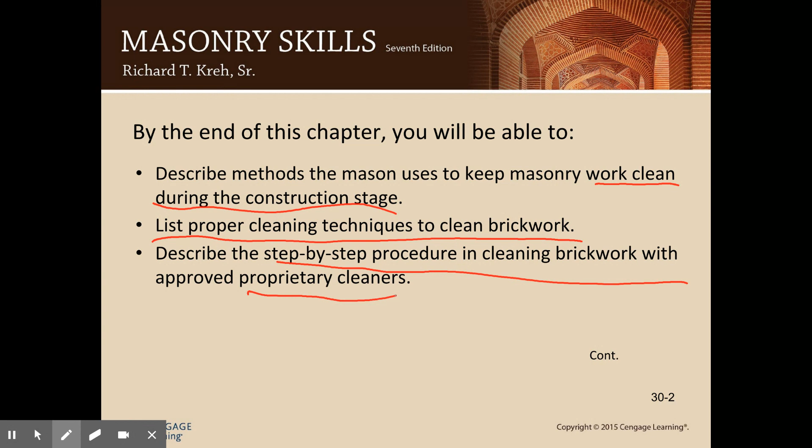You'll be able to talk about how to test approved cleaners, where to test them, what's required, and follow the brick manufacturer's recommendations for what you should use. You'll also be able to describe how concrete block are cleaned and what can happen if you don't clean them.

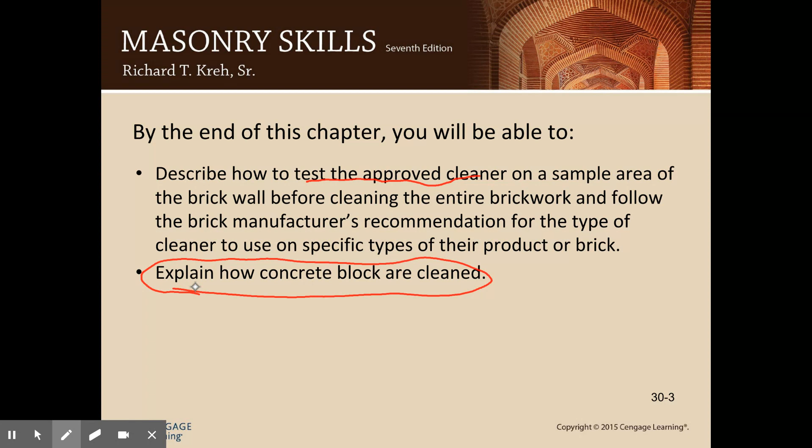After you get done laying your wall, regardless of the type of brick or block or joints, the last stage is to always clean up everything. You'll see when you're laying it, you might get specks of mortar here and there, maybe a glob there, and those all need to be cleaned off, because if you don't, it's going to look bad. If you're putting that much time and effort into it, it might as well look nice.

When you clean it, it thoroughly enhances the look of the brick and block, and leaves a much neater, uniform appearance. It's also an essential part of every masonry job that you do. Laying out, getting your materials together, laying your brick or block are just as important as cleaning it when you're done.

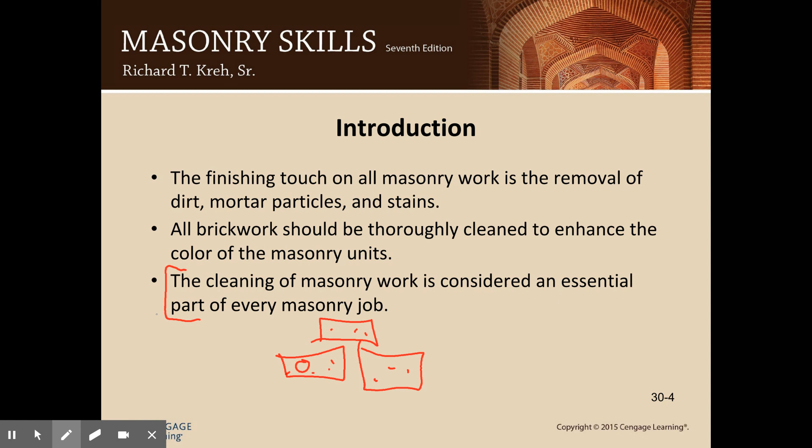There are different methods that we're going to go over for cleaning brick and block. Most importantly, you can see with this updated picture from about 1965, goggles are important, especially because of some of the solutions that you use. Some have acid, some are really strong detergents, and others have VOCs in them. So make sure you have your gloves on.

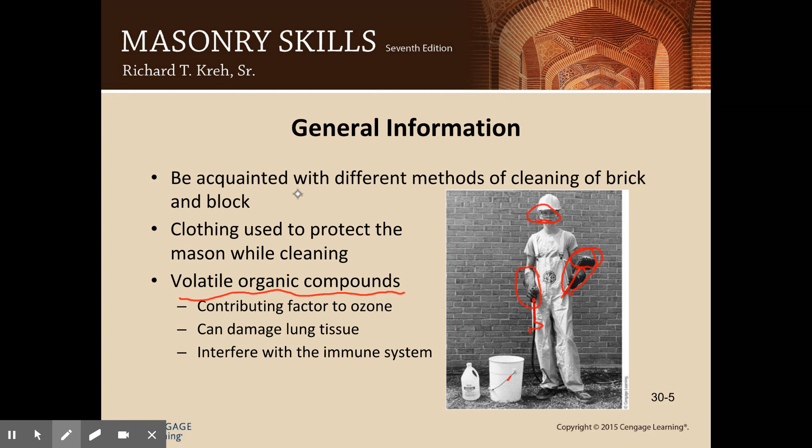You can see he has a stiff bristle brush with a long handle. Make sure you have a plastic bucket, a hose with an adjustable nozzle, and you should also have wood or concrete, like a piece of block or brick.

The reason you do that is if it's concrete block, you use a piece of concrete block and rub it across. If it's brick, you use a piece of brick and rub it across, and that gets most of it off. If there are big globs of it, or if it's really sloppy, there are ways to clean it off without marring the brick. You can also use a piece of wood to scrape off larger portions that you see.

As for VOCs, a lot of places are starting to get away from them. They're volatile organic compounds. You need to be outside to use a lot of them, and you're only allowed to be exposed to them for a certain amount of time. They can cause lung tissue damage, and sometimes you need a specific respirator just to use them.

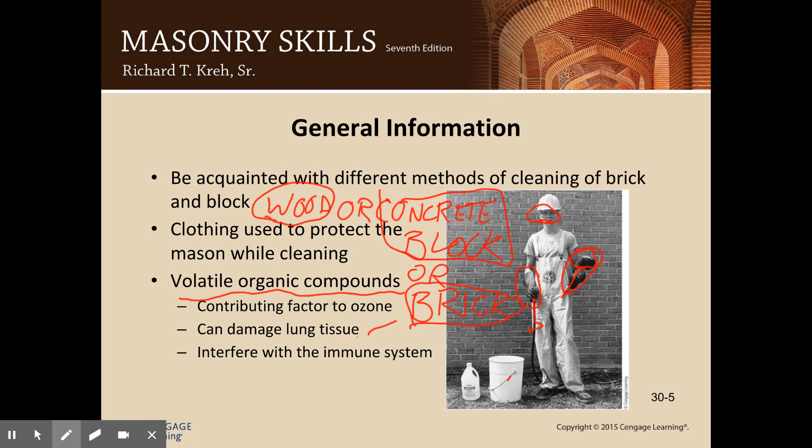Up until a few years ago, muriatic acid was the go-to for cleaning brick. It's a mild acid solution that gets scrubbed on, and it stops reacting with the mortar after about 10 minutes, and it helps dissolve it.

Now manufacturers recommend something else—they have their own cleaning solutions, usually proprietary ones they've tested and deem suitable for their brick. It's important not to clean or wash brickwork until at least 7 days after it's done. It's not because of the brick, but it gives the mortar enough set time. After 7 days, your mortar should be set, and then it'll be okay to scrape off the loose portions on the face of your brick or block, but it shouldn't affect the joints.

If you're going to use a new cleaner, always test it somewhere out of the way. Even if it's recommended, it might discolor the mortar or discolor the brick, so just keep aware of that, and make sure you test it somewhere where no one will really see.

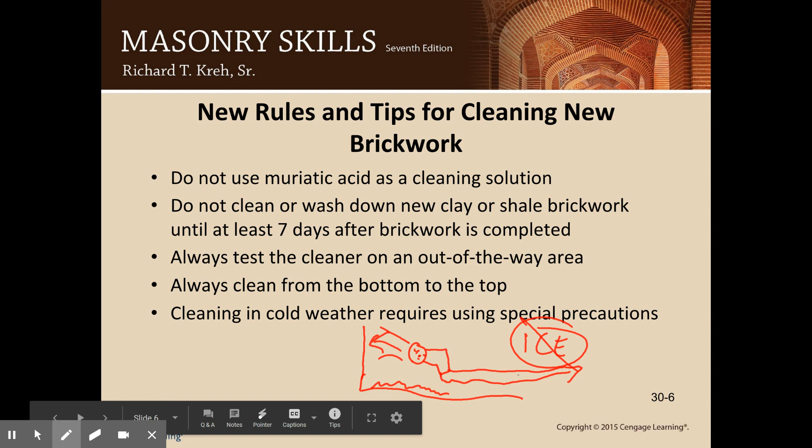So there are 3 categories of cleaning failures that you have. The first one is failure to saturate the brickwork, and I talked about this before, so we'll call it soak.

The reason for that is the brick will end up absorbing a lot of the cleaning solution, and that's what you don't want. You want the water to be there. You want the cleaning solution to mix with the water on the brick, not get absorbed by the brick, but work on the surface of it.

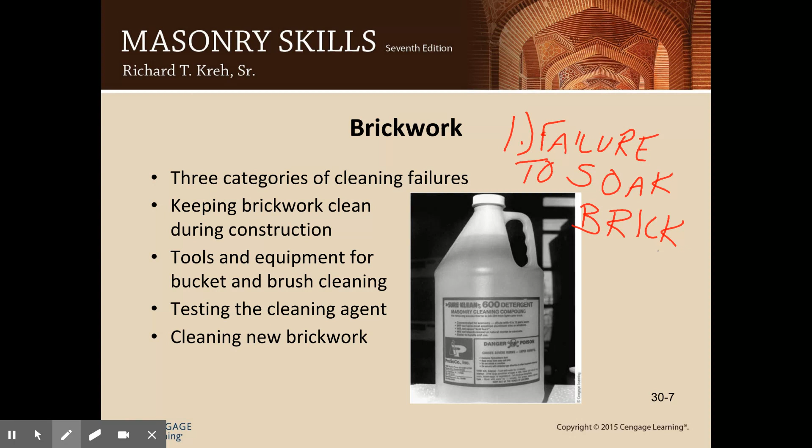Second common failure is failure to properly mix the chemical solution. I'm sure some of you are familiar with having to mix certain things. If this is a concentrate and it tells you that you need to mix 1 gallon of the concentrate to 10 gallons of water in order to be as effective as they want it to be, and you end up doing 1 gallon to 20 gallons of water, this will not clean as well.

So if you have this failure, obviously it's going to work maybe half as well. Some people try doing this because it ends up saving money, but in the long run it really doesn't. You still need to use more of the solution, and if you need to go back to clean it again, that's more time, more money, more material anyway.

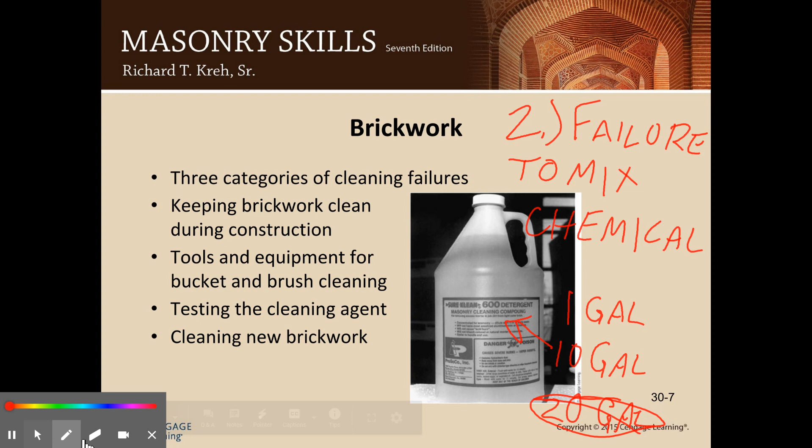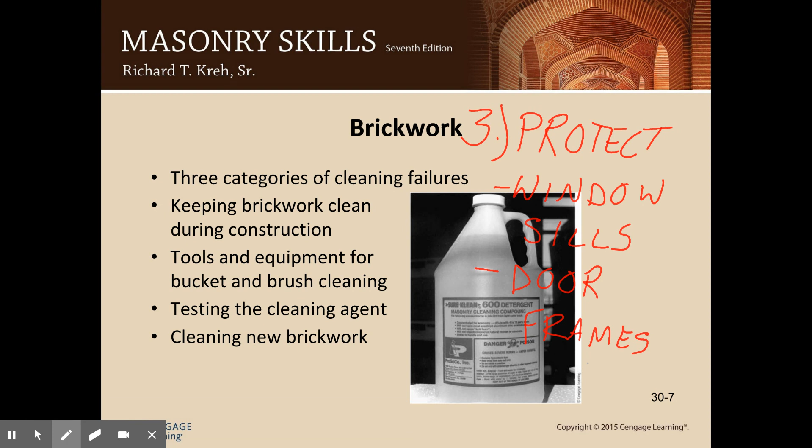So a third reason for failure is if you are using a solution that has specific properties, and you don't protect things that could get damaged, like windowsills and door frames, stuff more sensitive than masonry. If it's an acid, you could end up damaging it, and some cleaning detergents will discolor it. That's a cleaning failure, because even though you're trying to clean the brick, you end up damaging something else, and that's not the point of cleaning brick.

So if you keep brickwork clean during construction, it cuts down on the amount of scrubbing you have to do once the job's done. We already went over the tools and equipment, so always make sure it's a plastic or rubber bucket. You don't want to use a metal one. Metal buckets, depending on the solution, may react with it, and if it reacts with the cleaning solution, it could stain your brick. As we talked about before, test the cleaning agent, and always make sure it doesn't stain or discolor your brick.

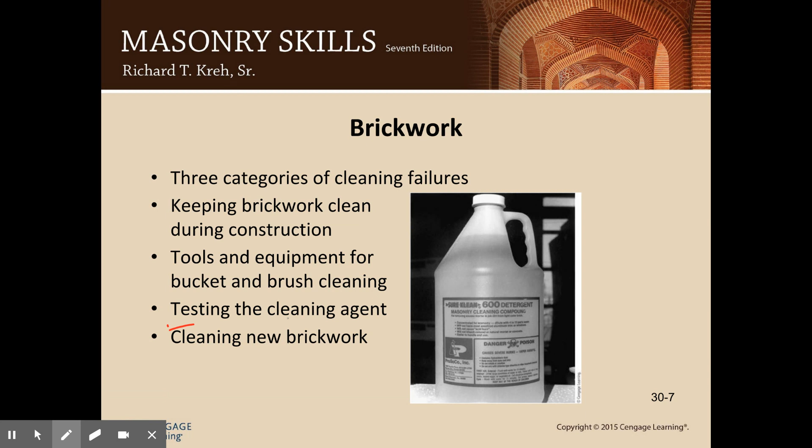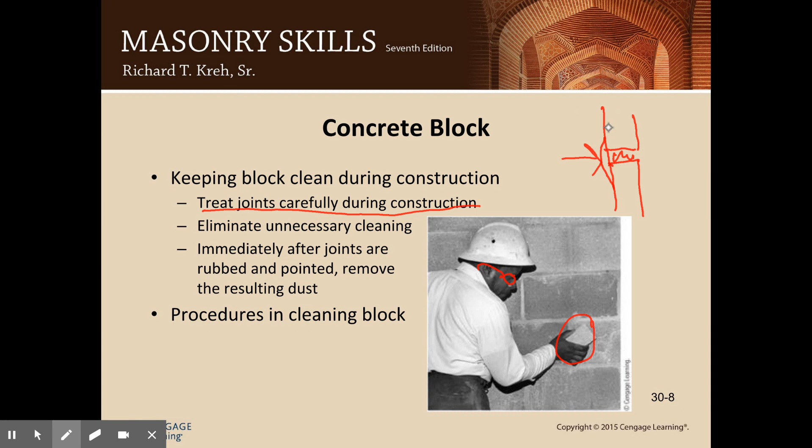Now, when you are laying block, it's important not to be sloppy. We went over in other videos the different types of joints you can have. If this is your block and this is your joint here, centered on the blocks, you can knock it back flush. But sometimes when people go to knock it back flush, you'll end up leaving a lump like that. It doesn't stick out that far, but it's still like a patch that you can see. If that occurs on a finished wall, you're going to see that through paint, through anything, and it just looks really bad. If you're taking the time to lay up a block wall, do a nice job. Be proud of the work you're doing and eliminate those.

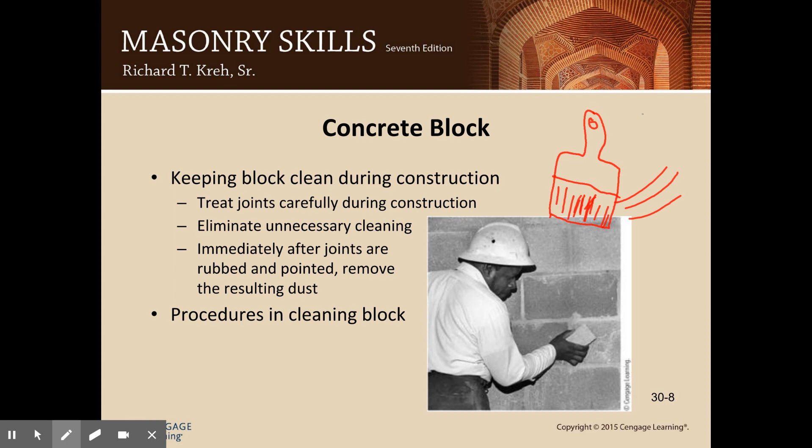Right after you're done pointing, and this guy's rubbing his joints with a block, get rid of the dust. Use your masonry brush, we went over those. It looks something like this, or like a big paintbrush. Sweep everything away, and that's pretty much it. Anything else we'll be doing in class, in the lab, and we'll get you guys going with cleaning brick and making it look sharp.